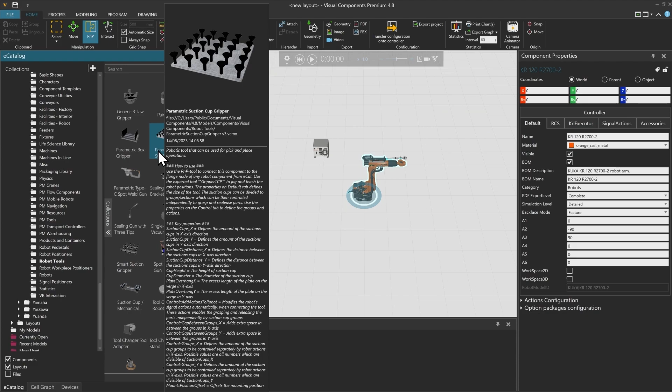Now that we have a robot, we still need some other things. For example, we will go to the Visual Components folder and here go to the robot tools and add this suction cup gripper to our layout. And with PnP, we're going to put it onto our robot.

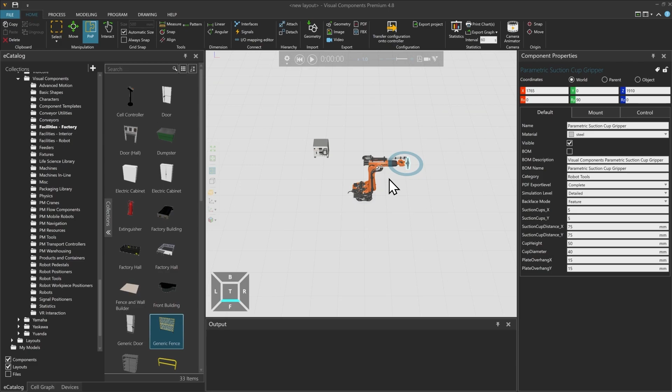In addition to that, we will need some facilities. So we go to the facilities factory and we're going to add a generic fence on the one side of the robot, just going to drop it here. And we're going to use some machines. So this coordinate measuring machine on the other side of the robot. And I'm just going to rotate it by 180 degrees so it's facing the other direction.

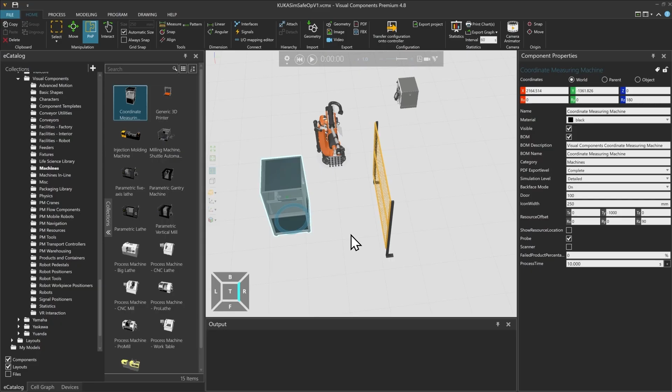Great, now that we have our little setup, we can proceed by just saving the layout real quick. And I will just overwrite this version 1. Great, now that this is done, we can continue with the actual configuration.

So for that, we need to be in the Home tab and then go down to Devices. And in this Devices, you can see the whole tree of our KUKA controller with the robot, some field bus configuration that you might add, or also the safety configuration. If I click on that, you can see on the right side that the properties are opening up, and I need to select the SafeOperation product here in the Safety product option.

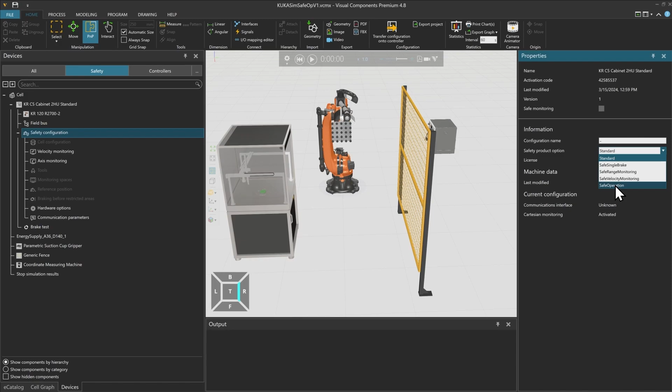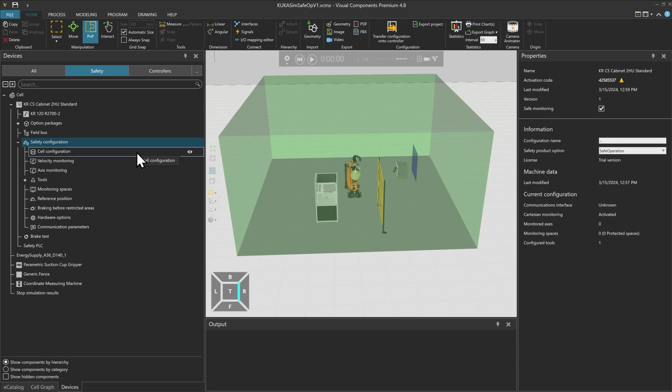Now you will see that this gray cube is generated in the simulation. We still need to activate the whole safety monitoring, so we will just tick the box here and our cube will turn green, meaning that we can now use it properly. This green cube is also the one that we're going to start with. This is the cell configuration, so it's actually the outer cell limits that we have.

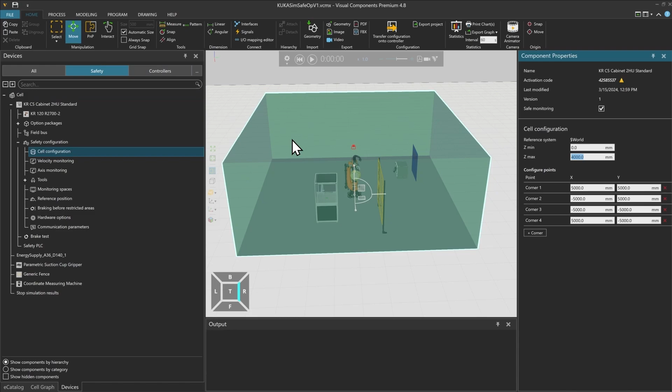And we can change here the size. So it's always in reference to our $world. And here we can now change the height, maybe to only 4 meters. And then if we go to the move manipulation mode, and click on the first corner that we have, we will see that the frame appears on this corner 1. And now we can actually drag and drop it into the position, or we can change the values according to our requirements that we might have from our designer or layout.

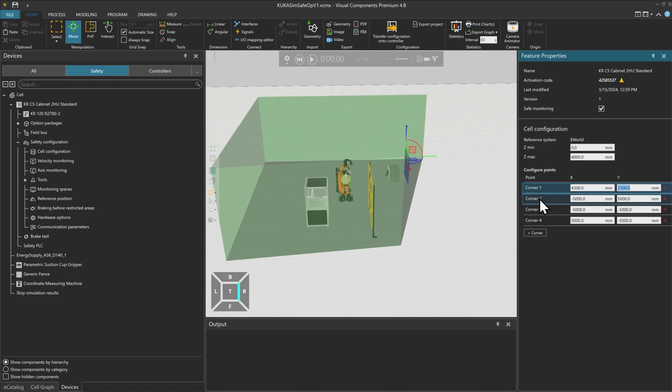And here then we can go to the corner number 2. And actually also drag and drop it into the place. Same for corner 3. And the last one, corner 4. You can also use the snap functionality.

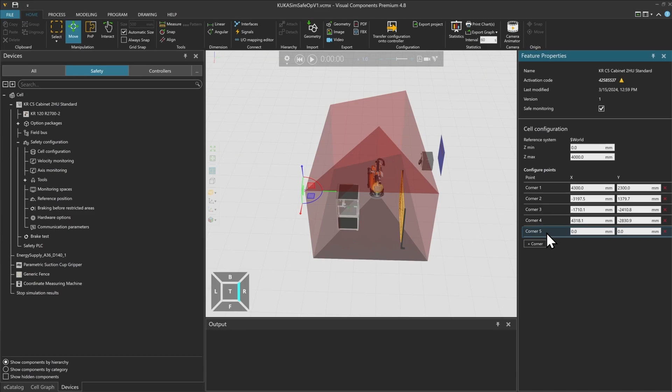And if you want to add a corner, you can just click on this plus corner on the bottom. And it will generate a new corner in the $world of the robot. And since it is not anymore a convex shape, we have to change again the corner until it gets green. And here we are. So now we have a working layout.

Great. As we have done that, we can now click here on the little eye to make the whole cell configuration invisible, and proceed with the configuration. And this is very close now to the things that you might know from WorkVisual. So all the settings can also be done here with the KUKA Sim add-on.

Here we can change the maximum velocity of Cartesian velocity monitoring or some axis velocities. You might have some requirements from your company with some different values that you have to put in here. I will go with the default values. Same goes for the axis monitoring. You can also change the monitoring here depending on what is your requirement from your company. Here I will also just leave them as default.

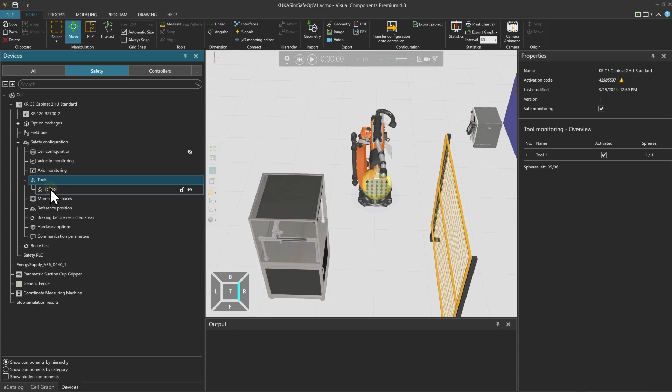What is more important to me right now is the tools. So these are also things that I can configure here. If I click on plus, I already see that I have one tool. So it's the yellow sphere here that has been added.

And as I clicked on it, I can now actually change the TCP of the tool. So I can drag it further up here until the front of the suction cup, somewhere like there. So it will be the place where the velocity monitoring is coming from.

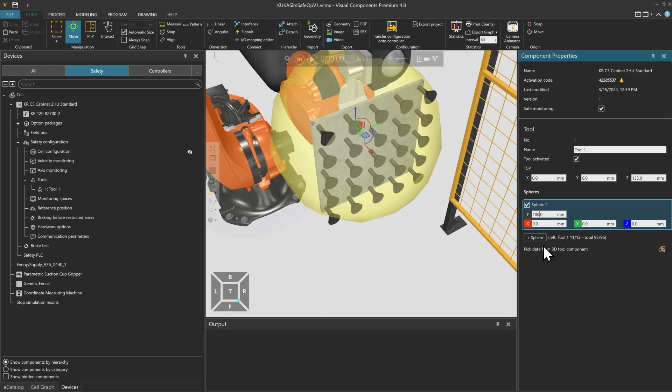In addition to that, I can now here change the sphere that has been predefined. So it's already been activated, but I can now reduce the size to maybe 100 millimeters and also change the position, either snap it to a certain point with the snap tool here, maybe here to the corner of the gripper, or I can move it around with this move operation mode. And I will set it such that the suction cup is still inside of the sphere.

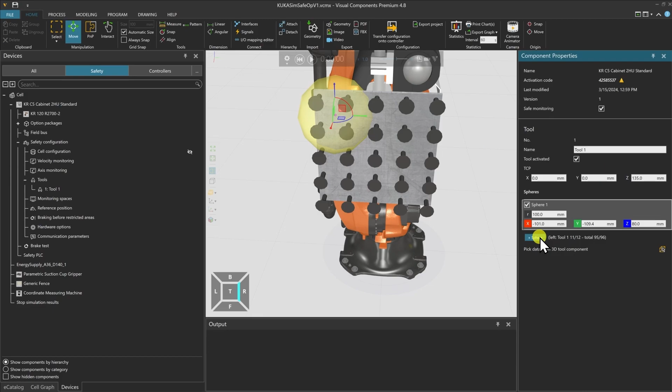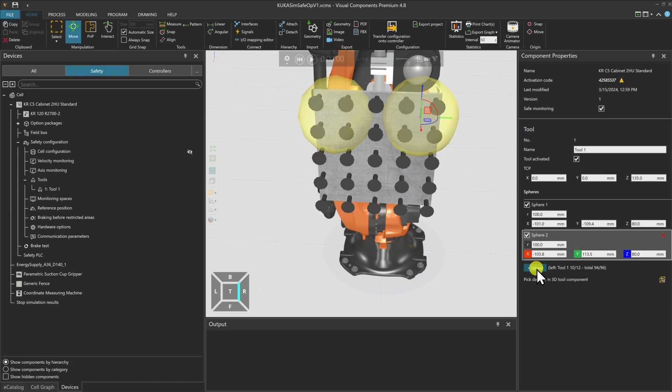Next up, I'm going to add a new sphere, and you will see that it's not yet been activated. So we'll do just that by clicking here the tick in the box, and it got yellow. So now I can use it properly. Again, I will change the size to 100 millimeters and snap it to the next corner here. Again, moving it so that all the suction cup is nicely in, but it doesn't take too much space around it. And I will repeat that for every single corner of my tool here.

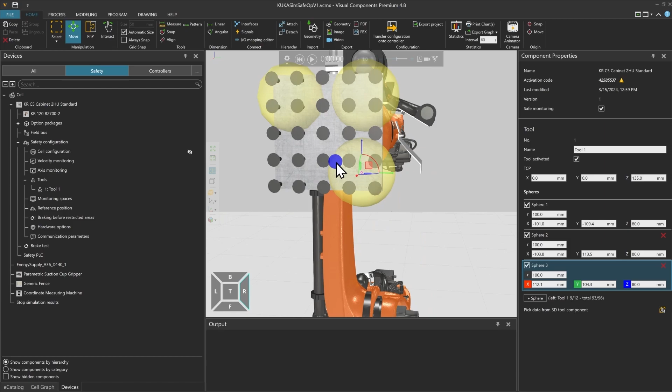So again, I will snap it to the corner here, change the size to 100 millimeters, and also change the position such that the cup on the bottom right is just in the sphere. And a last sphere here, so sphere number 4, also reduce it to 100 millimeters and snap it to the other side here.

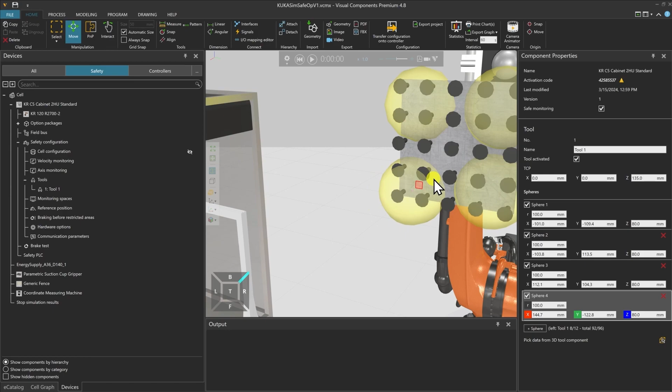Great, now that we're set, we can continue and we can actually add another tool here by right-clicking, add a new tool. But at the moment I just have this suction gripper tool, so I don't need another tool. But I can proceed with my monitoring spaces. So in this case, I can also right-click on them and add a new Cartesian space. It will add me this space number 1, which I could rename. So for example, fence. And define it as a protected space.

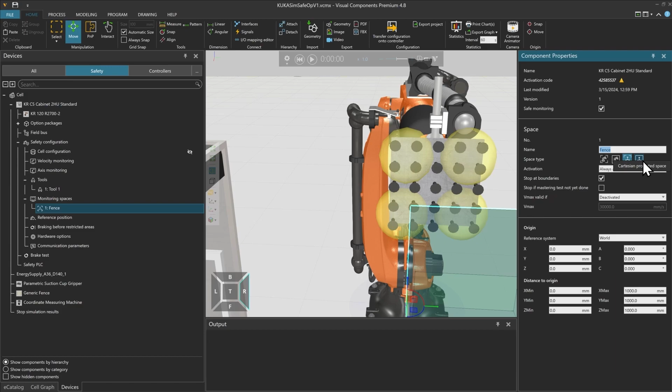So you have different kinds of spaces. For example, here this axis-specific space, you have an axis-specific protected space, you have a Cartesian workspace, or you have a Cartesian protected space. And this is the one that I'm going to choose. So it changed a little bit the color. And now I can snap it again to the fence that I have here, so the foot of my fence. And I can change the position a little bit, maybe something like that.

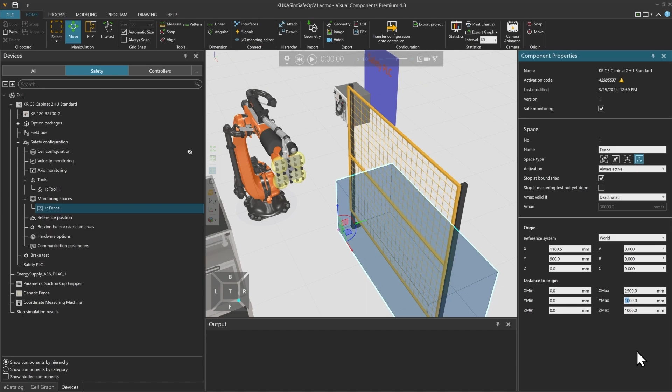And now change also the size. So in X, it's going to be 2500 millimeters. In Y, it's going to be about 40 centimeters. And in Z, it's also going to be 2500 millimeters so that I cover my whole fence.

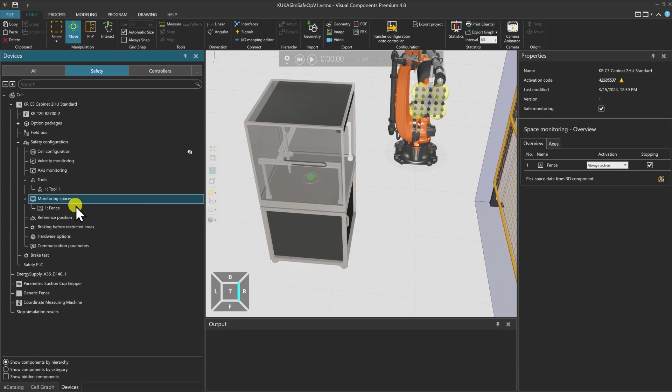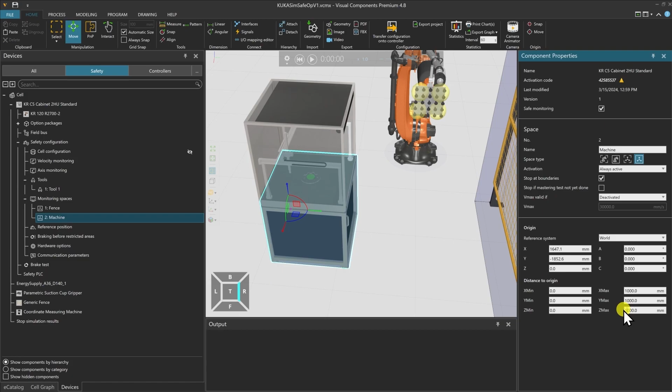And I will add another monitoring space by right-clicking here and adding a new Cartesian space. And if I select that one, I will also set it to a protected space, call it machine, and now drag and drop it to the other side here of my machine, leaving a little bit of space. And then again, make it a little bit taller, maybe 2 meters, to actually properly wrap my machine here.

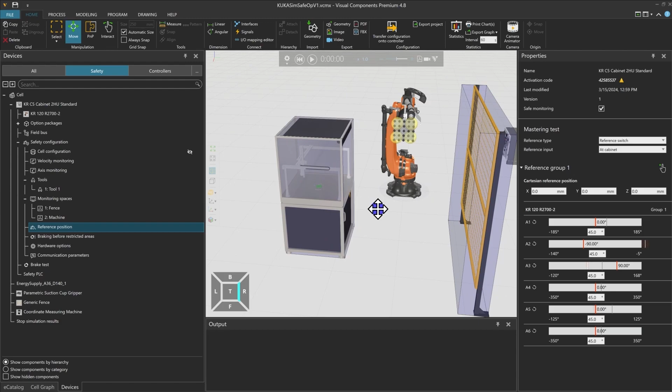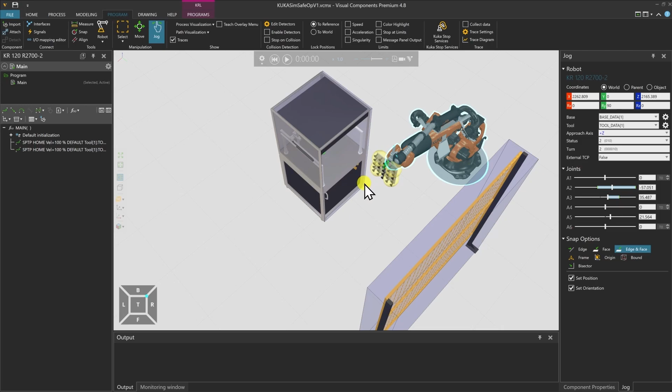I could also continue here with the next point, which is a reference position. I could now teach and touch up a new reference position. This is very useful if you want to check that the reference position is nicely positioned. And you can make this test up front in KUKA Sim. We can do this in a showcase if I go to Program and jog the robot around to a place that I think I might use as a reference position. I'm thinking about maybe here the lower point of my machine. Somewhere like that.

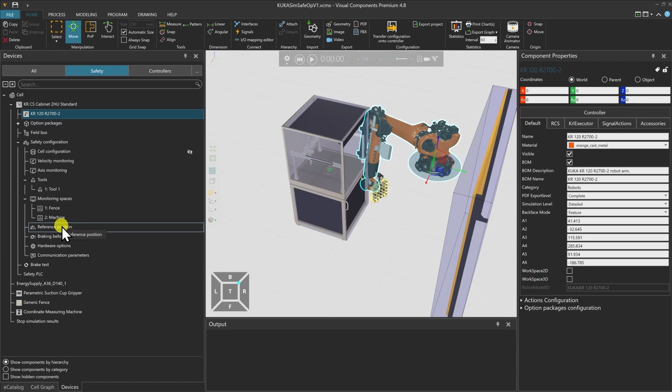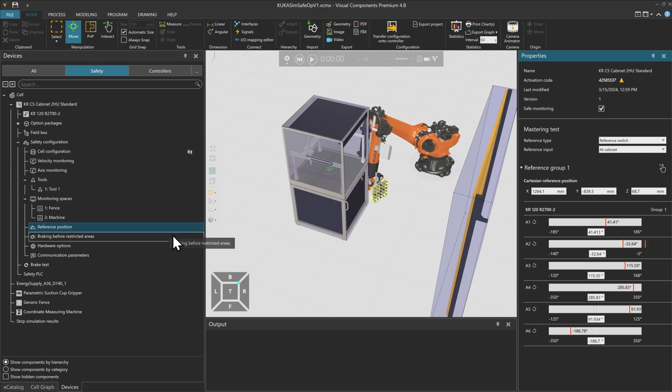And I now go back to the Home tab, Devices, and go to my reference position. I can see the current position of the robot, and I can see that it's not in the tolerance of 5 degrees around the 0 position. And thus I can use this position to touch up my reference point. Now we can just reset here the program or the robot into the home position.

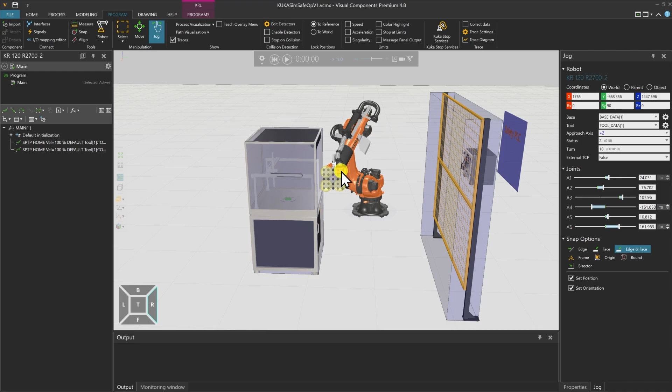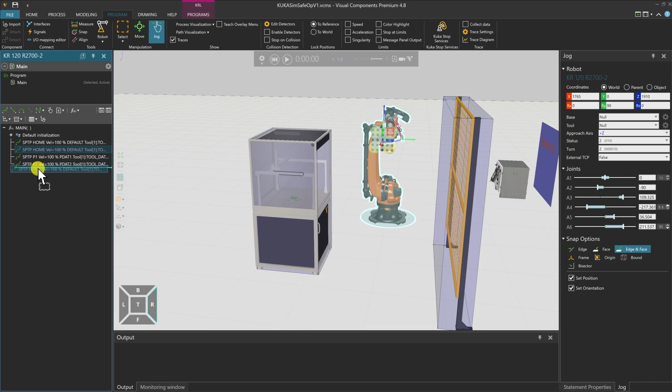And we can start with a little program where I will go with my tool from one side, almost touching the Cartesian protected space. We'll just do a PTP movement here to the other side. And doing another PTP movement here. And I'm just going to bring my home position to the other side. And if I now run the program and at the same time collect my data, and if I have a look at my trace settings and just play the program once,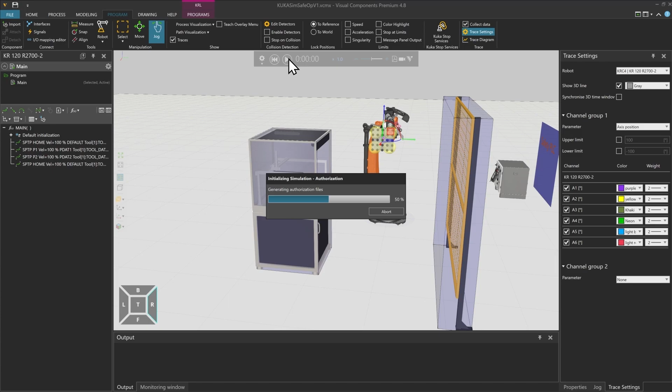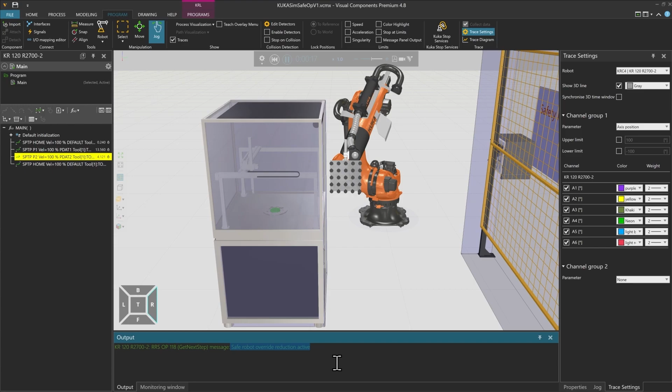it will now move. And it will actually now move very slowly. And I can see that it almost comes to a halt. And it will give me this message, Safe Robot Override Reduction Active. But it will not completely stop and go to the other side. And here the point is too far away from the protected space, so there is no real reduction.

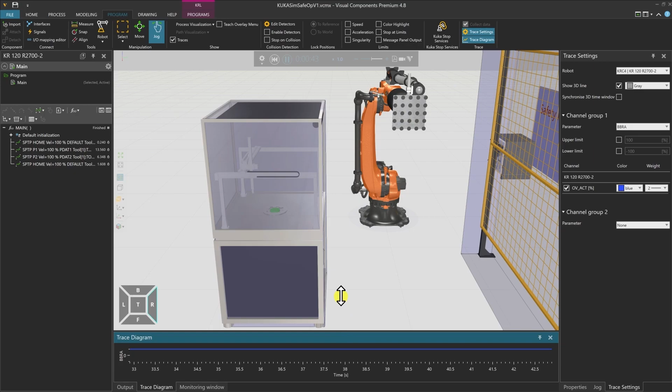If I now go to my trace analysis, I can have a look at the braking before restricted area value with the override in percent, which is going to be shown if I select the trace diagram. And if I look and make it a little bit bigger here, the output, or zoom out and move back in time, I can see that here at the start, the override was 100%.

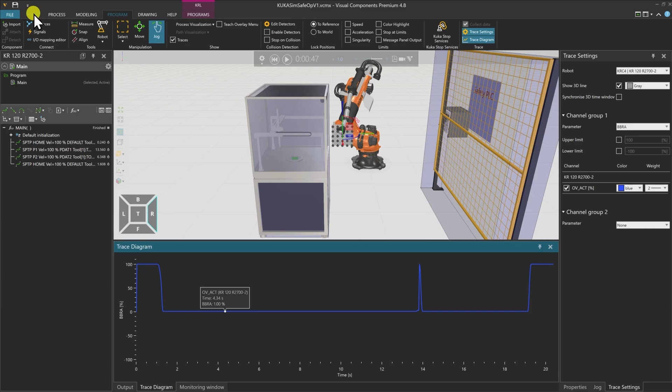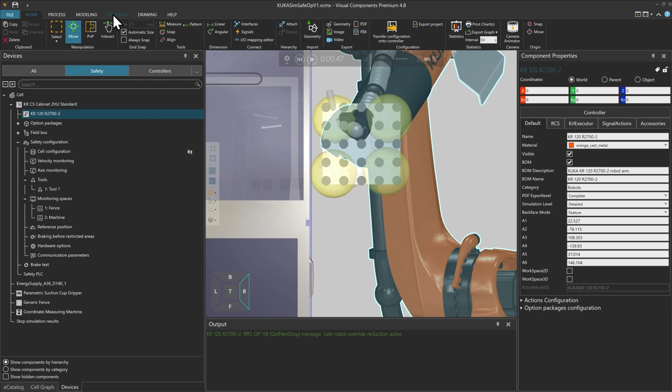Then it came here to a near stop, but it continued with 1%. So if I visualize the whole thing and go back to home and make the tool visible and go to the orthographic view, you can see that one of the spheres actually entered in my protected space, which is not my goal. But I can see this here in the trace diagram output that the braking before restricted area is 1%.

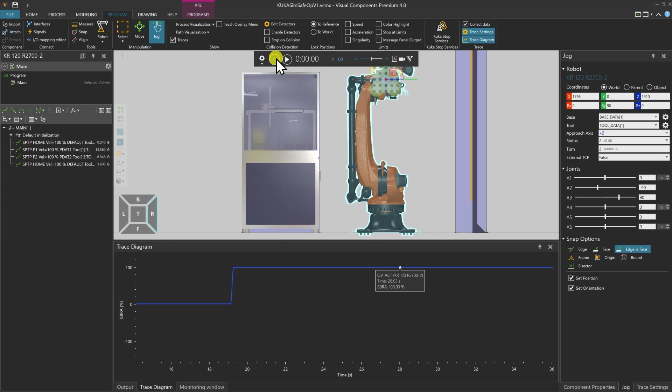All the way until it goes back and accelerates again here on the right side and goes all the way back to the other point where nothing happens and now goes back to the home position. In other words, even though I contacted this protected space, the robot didn't stop, which is not the same as in a real robot system. This is because the robot actually has no information about the way that the robot will stop in a stop zero situation.

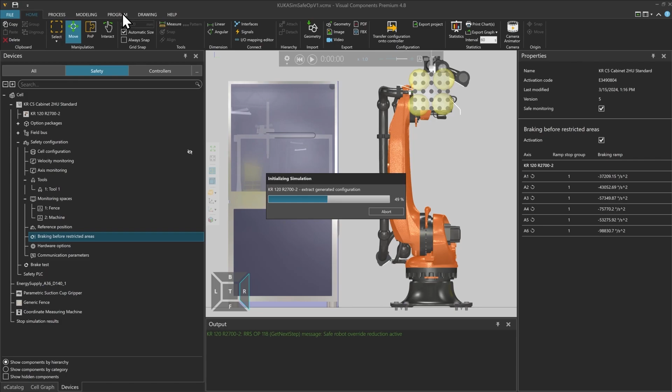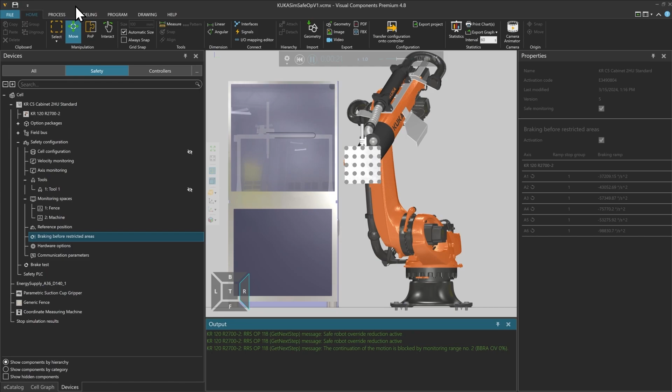So in this case, we have to go back to the home, and now here in the safety configuration to the braking before restricted area, and we can activate this BBRA functionality. And if we now continue and press play, the robot will brake earlier and come to a full stop until I get the message. The continuation of the motion is blocked by monitoring range, and we have a braking before restricted area override of 0%. In other words, if we now have a look at our program and the diagram there, we can see that the override reduction is at 0, so the robot is not moving anymore.

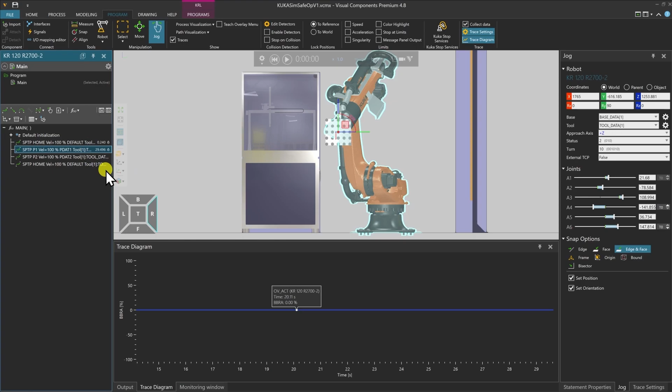So we can now adapt our point. If we reset the program, go to jog, click on our point number 1 and put it a little bit further away. Touch up this point. And the other point is actually not close enough to see a real impact, so I'm going to go a little bit closer, something like that. Touch it up also. And reset it and have another look. We have a reduction here also, and the robot goes back to home.

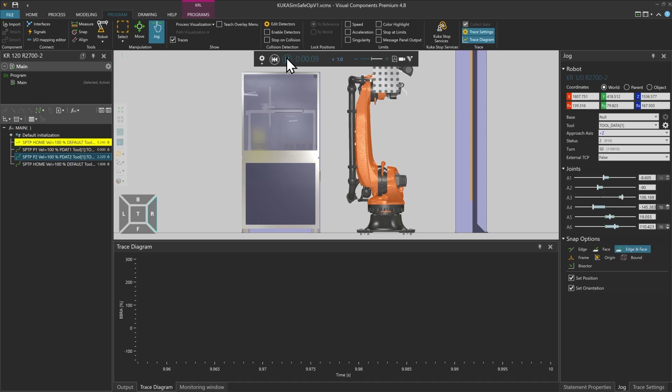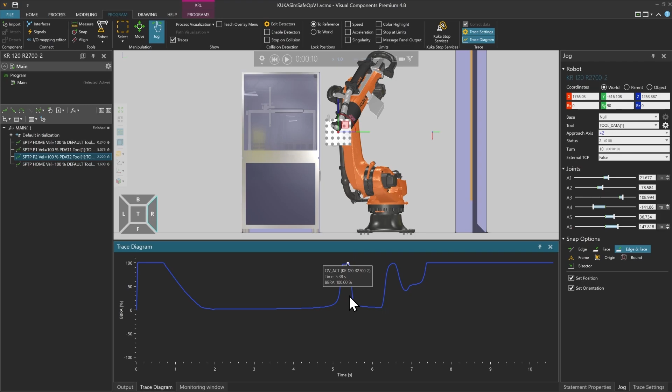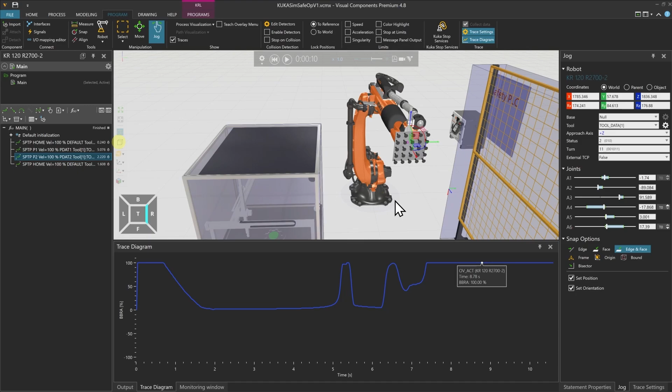So if we check out the BBRA path in the tracing, we can actually see that at the beginning there is no reduction. Then we reduce the speed when we come closer here to the protected space. Then it returns, and we have a full-blown acceleration again to the other side. And then back home. So here we have deceleration again for 0.2, and then on the way back into home position, there is no reduction anymore. So we can see that this braking before restricted area works well, and we can now adapt our protected spaces depending on the cycle times that we want to achieve.

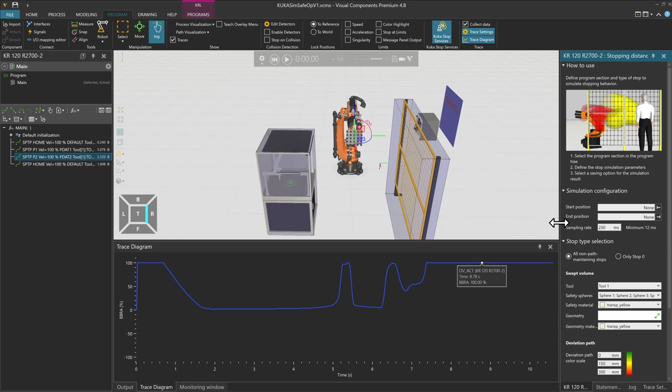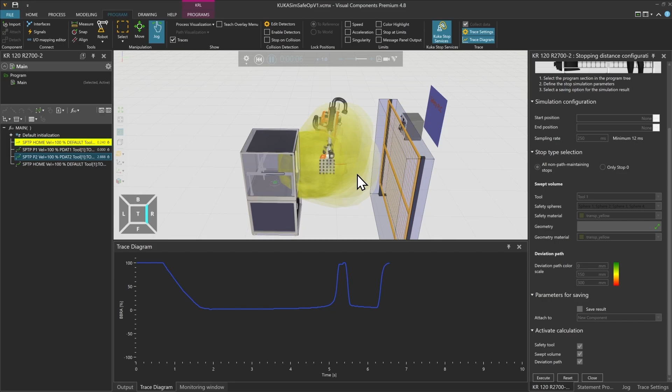There is another nice functionality that enables me to see and to simulate the stop 0 and the stop 1 spaces. In this case, we can use this KUKA stop service here, and it will give us some options. We can define a start and an end position. We can also define a tool. In this case, it's our tool 1. And if we now press play, we will get generated big spheres around our tool where you can expect the robot to go in the case of a stop 0 and stop 1 brake.

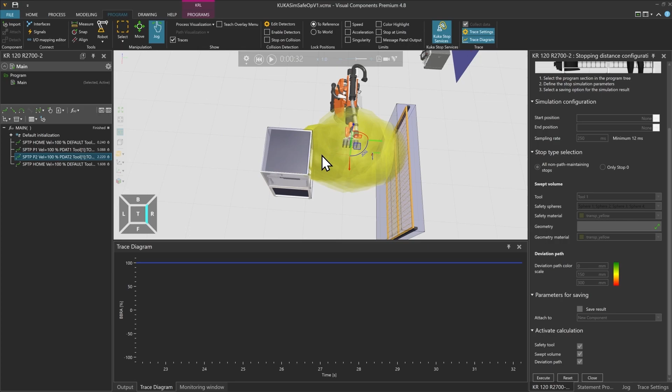So in this case, I would need to move my fence further away from the robot so that in case of a stop 0 there is no impact. Same goes for the machine. If I don't want it to be impacted if there is a stop 0 or stop 1, I must move it further away.

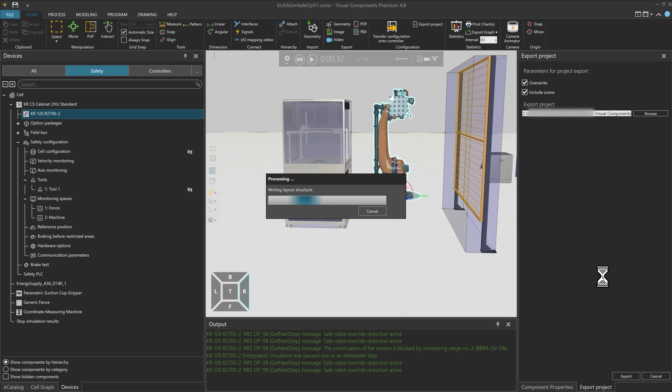There is one last functionality that I want to show you. It's again the export to WorkVisual. So if I go back to home and here say export project and export, and now go to my documents, Visual Components 4.8, my project, I will have the KUKA SimSafe operation project for WorkVisual. And if I double click on that, it will open WorkVisual.

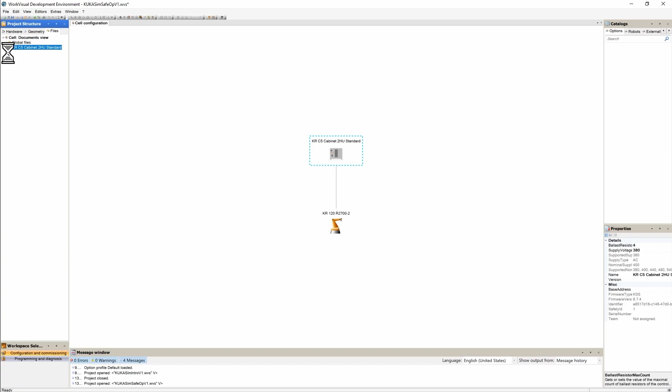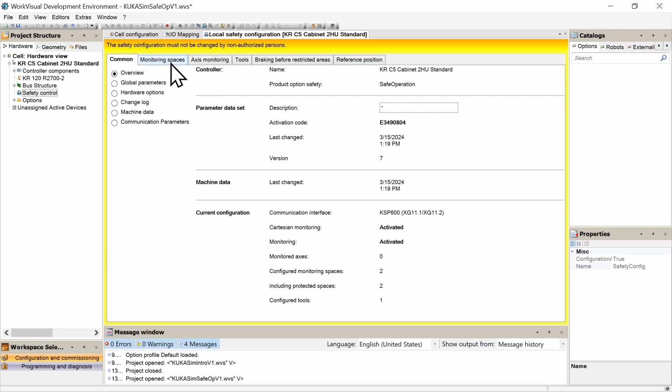And now that we have opened our WorkVisual project, we can go on our KRC5 cabinet, double click on that, go to the safety control and double click on this. And here we will find exactly the same settings as we just did in Visual Components with the KUKA Sim add-on. So we will have our monitoring spaces, so the fence and the machine. We will have the defined places in our layout. We'll have also the settings for the tools. So we first have the one tool here, and I can have a look also at the spheres that we set.

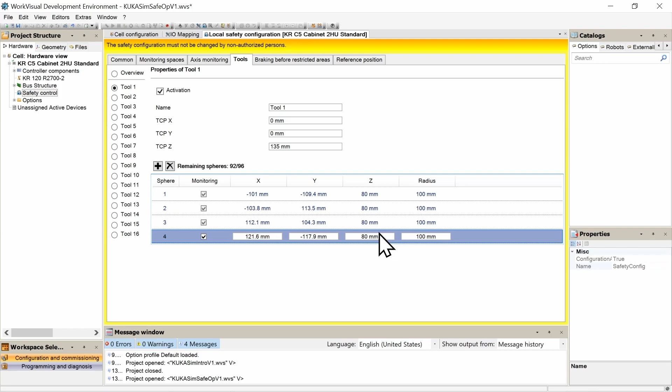We can have a look at the activation of our braking before restricted area and at our reference position. So everything is already set, and now you're good to go to actually commission the robot and to transfer the configuration onto the controller.

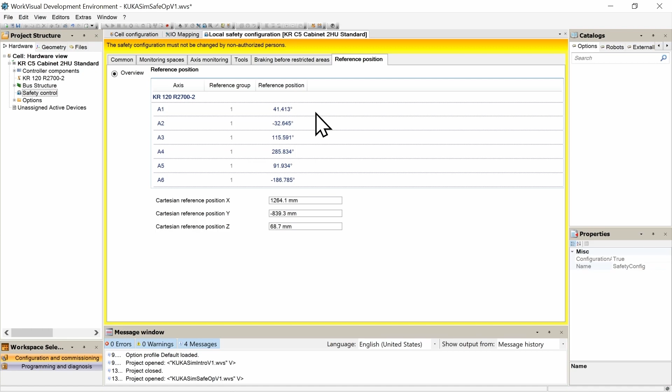I hope that this was useful. I hope that you liked this view of the braking before restricted area and the safe operation configuration with the export to WorkVisual.